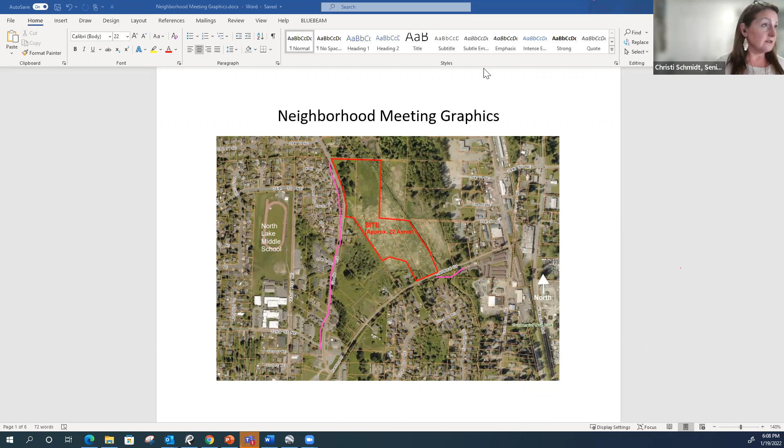As we move down on the screen here, we're going to scroll down. Let's get the eraser going here. We don't need the pink line the rest of the time.

As we move through the project timeline, many of you have been involved with this particular project for many years or have been aware of the historical nature of the site. Even around 2008, the city purchased properties from a private property owner, and the city had originally intended for the use of these properties to be a civic campus.

Back approximately, roughly around November 2016, Lake Stevens Senior Housing applied for a development agreement with the city of Lake Stevens. During this development review application, the city ended up selling these properties back in 2017 to Lake Stevens Senior Housing.

As many of you may or may not be aware, I've highlighted just some key points of the resolution here. The master plan originally, through a development agreement, vested a conceptual site plan and the zoning code and regulations at that time. It essentially vests the developer in place for development regulations.

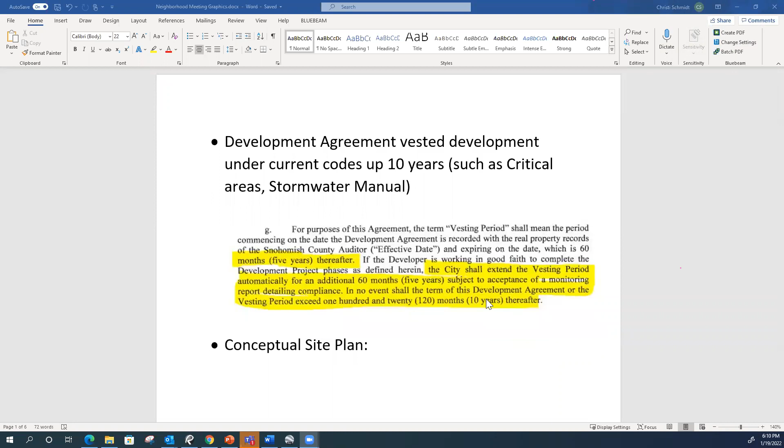As you can see here, the vesting period could be up to 10 years. So that is why when this development is being reviewed currently, it is vested actually under older development regulations.

As an example, if in future upcoming correspondence you see that a wetland buffer is smaller than what is under current regulations, that's because they are vested under the older regulations with different standards.

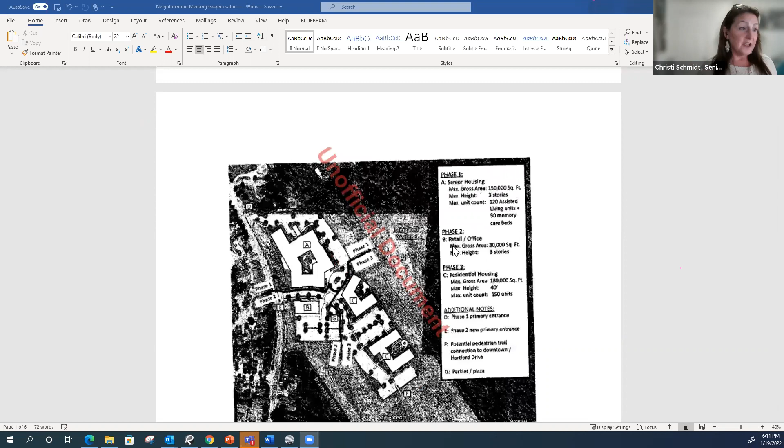So the conceptual site plan at that time for that particular development agreement, you may recall, had 3 different phases. Phase 1 had a senior housing component. Phase 2 had retail, office, and some employment factors. And in addition, it had a component for residential housing.

And here is the older site plan, the conceptual site plan for this particular area.

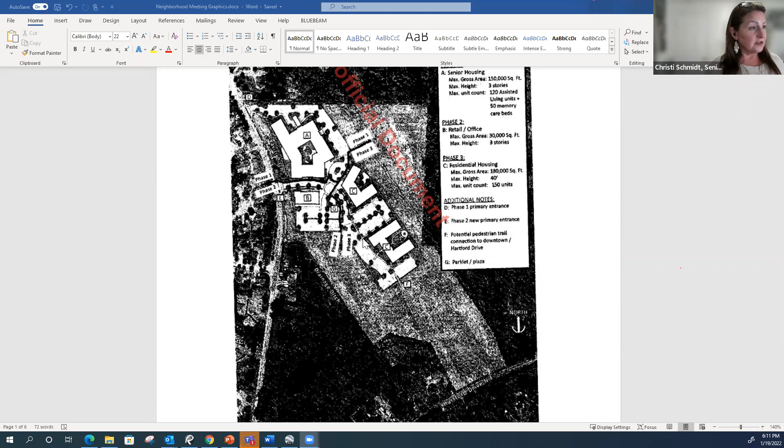Then in 2021, the development agreement was amended to allow residential uses and greater flexibility. That amendment was approved last year in August, I believe. The project planner is also here present this evening, should anyone have any specific questions regarding that amendment.

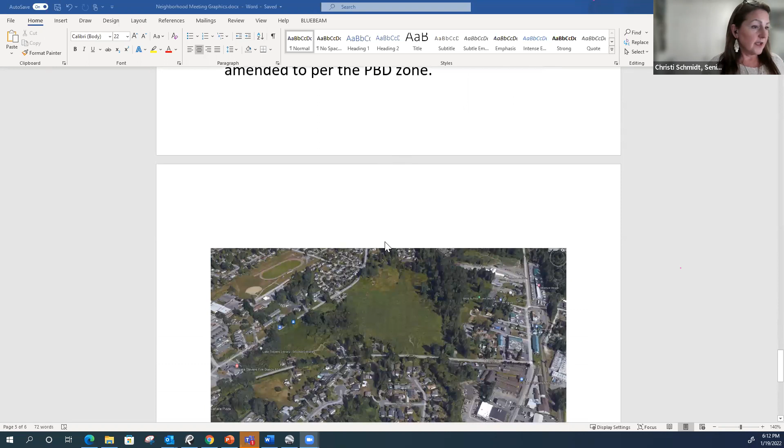Consistent with the development agreement amendment, LDC, the applicant, and MSR Communities submitted the current development application, which you see before you today. And with that, I'm going to go ahead and pull up the preliminary site plan just to show it, and then I will turn it over to the developer so they can present the development application.

Currently, the development proposal represents the residential portion and component of phase 3 of the original conceptual master plan. They are currently proposing a mix of single family homes along with townhomes: a total of 28 single family homes and 29 townhomes.

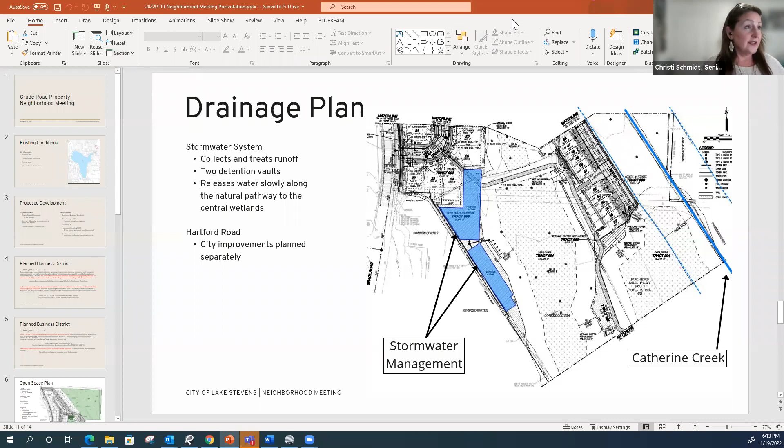Okay, thank you, Christi. I'm going to pull up the presentation. All right, can everybody see that?

Yep, okay. Hello, my name is Samantha Adams. I'm with LDC, and I'm a planner that has been working on this project out on Grade Road. I put together this presentation really just to give everyone a little bit of information about what's being proposed on site before we get into some of the questions.

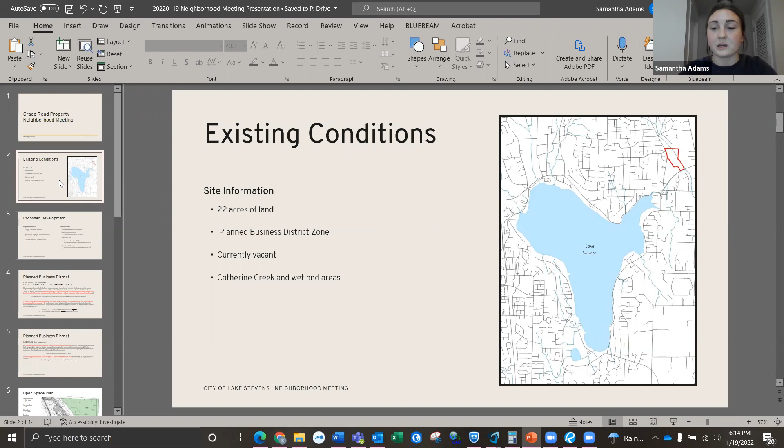Christi already mentioned some of the information that I'm going to cover, but this site, as many of you know, is located in the northeast area of the city of Lake Stevens. It totals 22 acres of land and is made up of 6 different parcels. It's in the planned business district zone, and the site is currently vacant, but Catherine Creek and associated wetlands are present on site.

A little bit about the proposed development.

Of the 22 acres on site, roughly 6 acres will be used for development. The remaining area on site will be left as protected critical areas and recreational open space. And as Christi mentioned, what's proposed on site is 57 residential housing units. Half will be your standard single family home, half will be attached single family home.

A little bit about where we're at in the permitting process. As Christi mentioned, there was a development agreement that was amended last year through the administrative modification process. Now we're currently at the point where the master development plan and the preliminary plat are being reviewed concurrently by the city of Lake Stevens.

Then for your environmental permitting and review, it's your standard SEPA and stormwater permit issuance by the Department of Ecology.

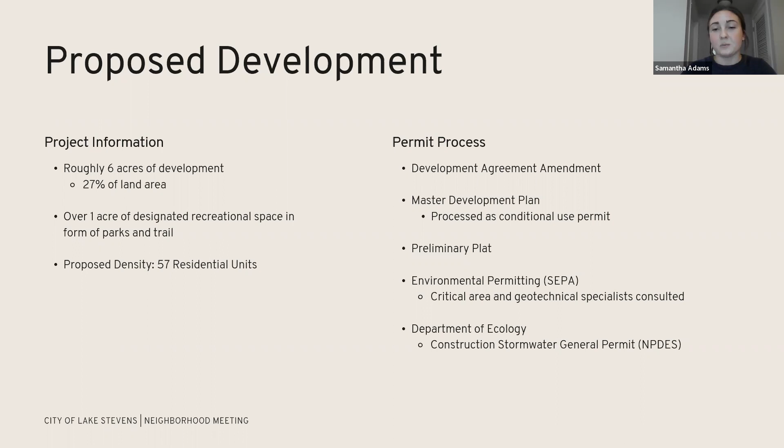I just want to touch on a couple pieces of the planned business district code as it relates to developing fully residential within this zone. Developing fully residential in the planned business district is allowed when certain criteria are met, and I just want to go over those 4 criteria. Clay White is going to go over the first criteria, and that's the economic analysis. That's the first requirement.

One of the things I'm happy to take questions on is I was involved with the project with the previous folks that were looking at developing the site for the senior housing and assisted living facility. When the original development agreement was applied for, as Christy had shared with you, there were some commercial components originally planned for. But after the development was approved, we went through the same analysis on commercial, and it was discovered that it just wasn't economically feasible to provide commercial there. It just didn't have the right mix of traffic. We had hired an economist as part of that project too, and it just didn't pencil out. It just doesn't work for that site for the uses that were proposed.

So fast forward, we're part of this project, it was looked at as well. While the code mentions mixed use or commercial uses, it also has a process where if you're not going to propose a commercial element to your project, there's two tests. One is demonstrating why it may not work. But two is making sure that it's not going to frustrate the overall goals of the city in terms of jobs or economic development. So we had a study produced by ECONorthwest that's part of our application packet, which goes through the code requirements as to why we're not having a commercial component as part of this project.

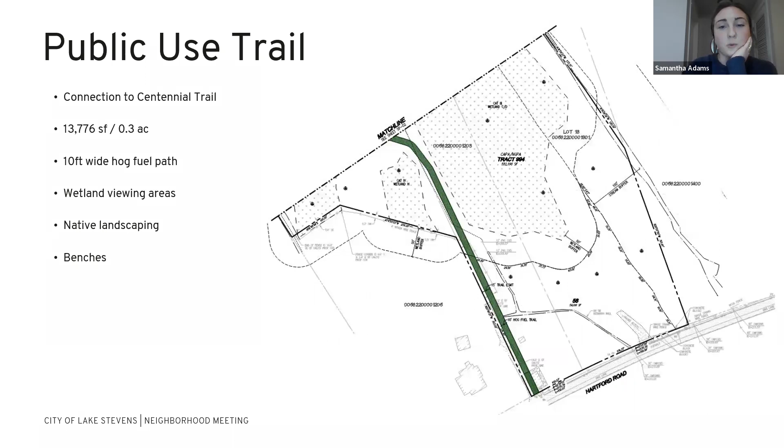Next, we're going to talk a little bit about stormwater management, and I'm going to have project engineer Joe Hopper talk about that.

Okay, can everybody hear me?

I'm Joe Hopper with LDC. We've done some preliminary analysis of the stormwater on site, and what we're proposing is to treat the stormwater in a stormwater vault, or what's called in the industry an R-tank. That's one of the options we're looking at. We're still flexible because we're in the preliminary phases. What we'll do is collect all the stormwater runoff and store it in a standard stormwater vault type structure underground. That allows us to use the space the stormwater facilities are in as dual purpose—we can place park area on top of that, so we're using the space twice.

We'll be modeling our stormwater to the pre-developed runoff rates and peak rates, so we will not harm the downstream environment. We'll disperse the flows from our stormwater facility into the on-site wetland, and once the water gets into the wetland, it flows further south to Hartford Road, to the ditch along Hartford Road, and then ultimately discharges to Catherine Creek. The stormwater analysis was based on the Department of Ecology Stormwater Manual and the City of Lake Stevens stormwater requirements as amended.

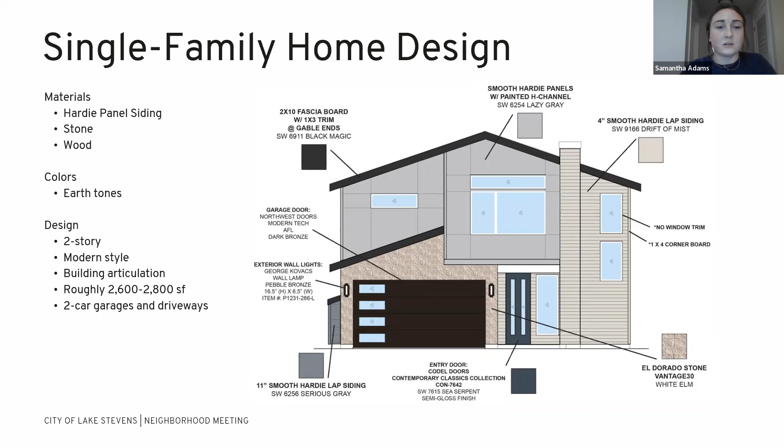Single family homes will be 2 stories tall, roughly 2,700 square feet. The townhome design is very similar in color and materials. These will be a bit smaller, around 1,500 square feet, and they will range between 2 and 3 stories.

So that's really the last of my presentation, and I think we can get into the questions now, but I hope some of that information was helpful.

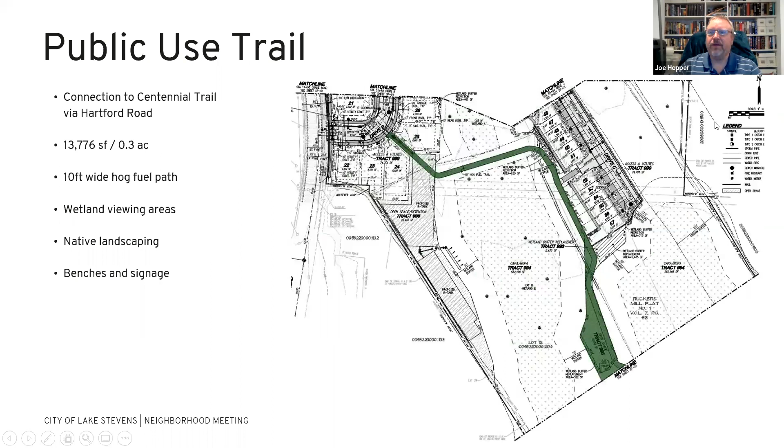So to reiterate where our discharge is for the stormwater, we will be discharging to the wetland, and actually not even into the wetland, into the wetland buffer. So there will be some overland flow from the detention system across the buffer to the wetland. Naturally, the wetland then does drain to the Hartford Road ditch, or the Levitt Ditch as I've been informed now, and onto Catherine Creek.

Downstream, we are aware that there are some issues with the conveyance capacities. That's a city issue, that's not necessarily our issue. I don't want to defer that as far as this development is concerned. And in the technical review, the city will bring up those items as well.

And if there are things that this development will affect, the developer and the engineers will be responsible for contributing or for correcting some issues, or at least sharing in the cost of some of those things as the city identifies them. So that will be part of the technical review. I don't want to step on the city's opinion on that, but that's typically how these projects go.

So what we're trying to do as far as the development is to take the stormwater drainage that comes from the new impervious areas, put it in a holding tank that releases the flows at flow rates even less than what's currently flowing to the wetland, and also cleaning the water at the same time. So we have a twofold facility that will help mitigate the stormwater releases from the development to a pre-developed condition that's actually more conservative than what is there now.

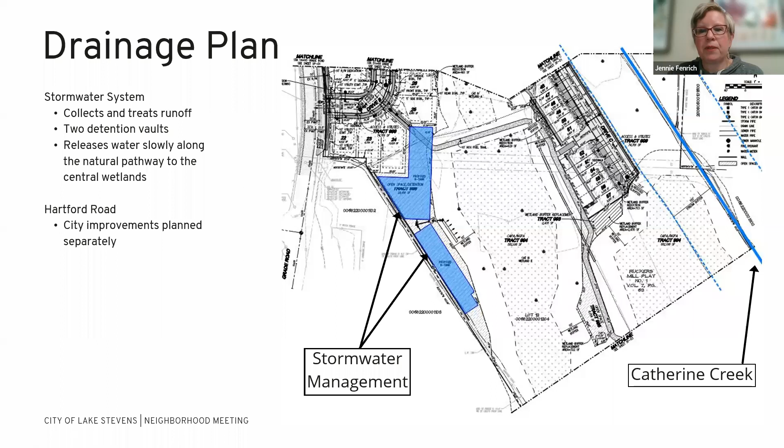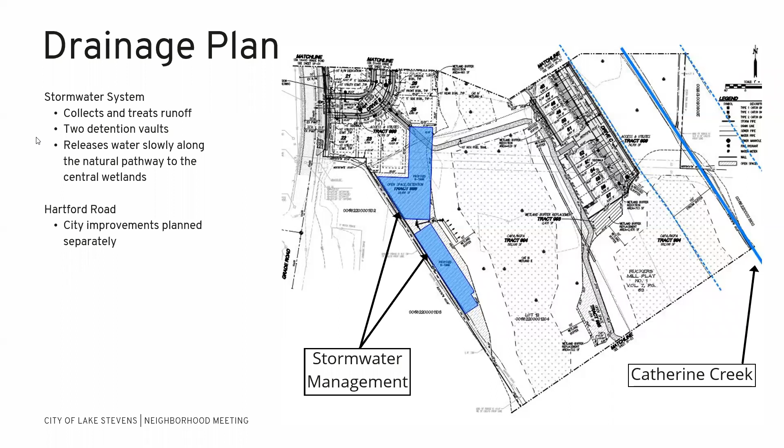I've got a lot of questions, I don't want to get carried away with a ton of them, so I want to go back up a little bit first. In the process of creating a new site plan based on the old, you went from a very large healthcare plan, scaled that down to something smaller that was now entirely residential. I'm wondering, in that process of redesigning the site plan to fit current needs and current economy, did you consider affordable housing of some type? Did you look into that?

Yeah Sammy, I can take this one if you like. Yeah, that's fine, it's just hard for me to see who's speaking when I don't have this window up. So I think all of you can see the window. I apologize, but I do need it up. Okay, yeah.

Just talk a little bit about the old project - it's 2 different groups of people working on that. The previous project went through a lot of design iterations after the development agreement was approved, and it ended up that it just wasn't financially feasible for the group. Then it sat vacant for a number of years, and others looked at it for the same thing, and it just wasn't gonna pencil out because it's a complex site. So in terms of affordable housing, that is not something we looked at as part of our original submittal here. We're proposing it just as market rate housing.

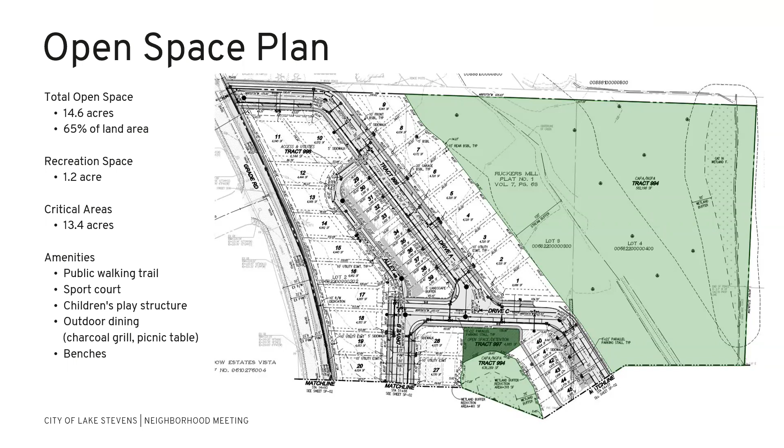So, another question: in the land use application, it talks about the approval of the development agreement, and then it was amended through an administrative modification. I believe that's what you're talking about—is that correct? Yes, you're absolutely correct. Who made that? Who approved that administrative modification? The minor modifications—let me pull it back up.

Yeah, I can chime in on that. The administrative modification is actually a type 1, an administrative decision. It does not require approval. It doesn't need to go to the hearing examiner, and it doesn't require going back to the city council.

Development agreements are a type of land use application that can be modified through that administrative modification if it meets the criteria in, I believe, chapter 14.16C.025. You need to meet all of the criteria in there. Some of the major ones are that it can't create new access points, and it can't increase the density or intensity of development on the site. As long as it meets all of the criteria under the administrative modification, it can be modified through that admin mod process as opposed to being processed as a new development agreement.

That was what was issued back in August. That decision, being a type 1 decision, is issued by the community development director. I'm not sure if that's been uploaded to the city website, but that's something we can upload or make available so people can see the staff report and the decision issued by the community development director on that administrative modification.

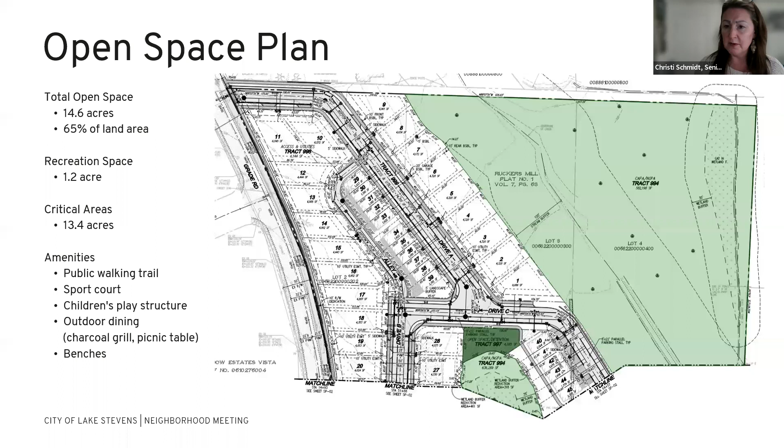Yes, that has been uploaded, and so have the 2 other development agreements. I uploaded them to each application last week, so you'll see those uploaded there. And I can go ahead and share my screen right now if that would be appropriate. Samantha, if you wanted to stop screen sharing really quick, I'll just pull it up.

While you're doing that, if you could forgive me for my ignorance, but who is the community development... forget the title, what you just said. I'm just really trying to get to who approved this.

Sure. Yeah, so Russ Wright is the community development director. I don't have my participant screen up on, but I know that he was on earlier. But yes, he's the one that has authority per the Lake Stevens Municipal Code to issue decisions and approve applications for type 1 land use applications, including administrative modifications. Thank you, thank you very much.

I have one comment, and there was some discussion of this earlier. One of the homeowners there was talking about it. The previous attempt at a development, as I understand it, was abandoned because it wasn't economically viable, due to the wetlands. As I understand it, because of the wetlands, there just wasn't enough developable area to do it.

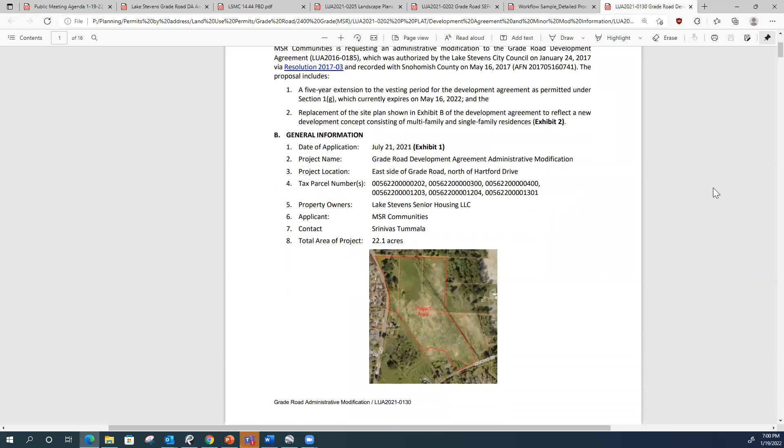The other thing is, this can't be done in a vacuum. I understand the developer's not responsible for the existing flooding. It's been told that the city is, but everyone that lives in this area knows that from the apartments just south of Hartford, all of Hartford, the whole area has flooding issues. I understand that the water will be retained and then fed out into the open space at a lower rate than it might be now, based on study, but it still rains and it's still going to have water, and the same amount of water is going to go into what's left of a smaller open space. That whole area floods as it is right now.

And this entire development goes right up against Catherine Creek, which is a spawning stream. I would need a lot more convincing to be convinced that this is not going to make things worse. It is bad right now, and what we've got is kind of a mess right now. We're saying, well, we're pretty sure that we're not going to make it worse, but again, it can't be looked at in a vacuum because it's a mess right now. That's all I have to say. Thank you for your time.

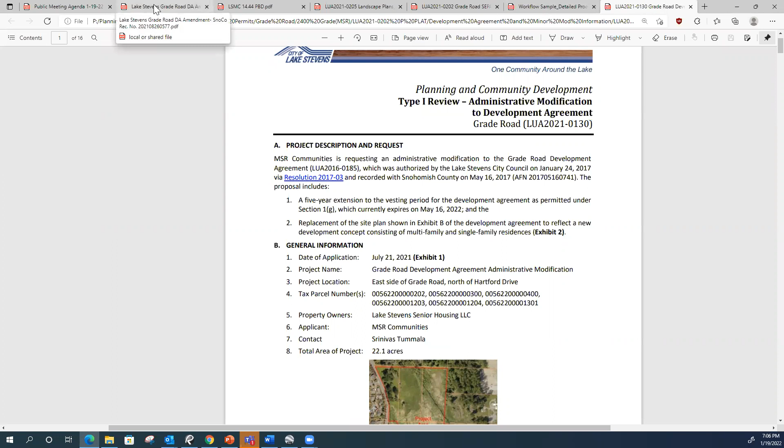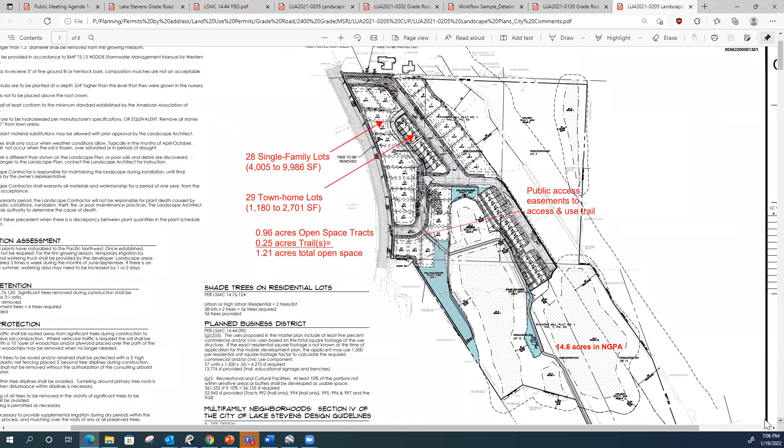But I used to live up near the high school, and I think it was about 6 or 7 years ago, off Highway 92 and behind Highland Elementary School. A very, very large development went in and was a shock to everyone because at the time it was explained that the permit was, I think, maybe 15 years. They had asked for the permit in 2006, don't quote me on the exact year. Then the economy happened, and they renewed it, and renewed it again, and they were coming to the end of it, and they had to get something going. I thought, and I may be wrong, that the city had decided there was only a certain number of permits like that still out there because the economy had been hurt and these permits were coming up.

Now I'm hearing this one is on the second round and they're able to go back and keep some of the requirements of the first permit. And I thought we weren't going to do that, that new permits would have to follow the new codes. And if that is not true, how many permits are still out there that will be able to build on old codes? Thank you.

Okay, sorry, I had some extra comments pop in. Sue, in response to your question, I'm not aware of the historical reference of that project since I'm recently new to staff, starting last year. I do know this particular project has been around since 2016, and they do have vesting requirements. I'm not familiar with the specific project you're referring to, and I don't know if any other staff on this meeting has background information to respond. If so, please feel welcome to speak. If not, I'll have to save that, or you could email me and I could address it offline.

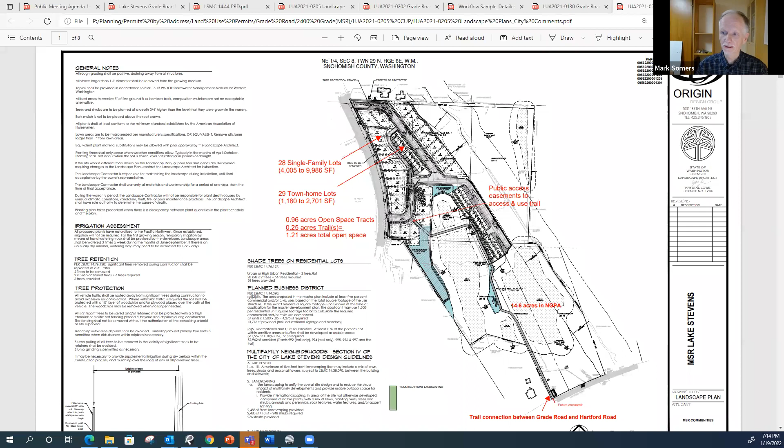Okay, well, no, that's good to know. You can ask to be put on a list, a contact list. Yes, and I will go over that just as soon as we have all the questions answered. Okay, thank you. Can I ask one more question? Of course.

We're going to have playgrounds, open space, recreational area, and the trail. Will there be on-site parking for those picnic tables and barbecue grills? Yes, Tom, there will be some parallel parking spaces along the internal drives on site.

Thank you. And then the city is having trouble dedicating what we call tot lots or subdivision playgrounds. The city no longer really wants those dedicated. How are you going to get around that contradiction?

The open space areas are going to be private. They're part of the development with the exception of the trail system, so those will be maintained privately. That is correct. There would be a public access easement through the private roadway, the public roadway, to access the trail through the development, but the separate recreational tracts are owned and maintained by the HOA.

But is the public allowed to use the barbecue grills or the playground equipment? It's being designed for the residents. The trail is open to the public. Then how does that meet the 5% civic use requirement? It's the trail, if you calculate the square footage.

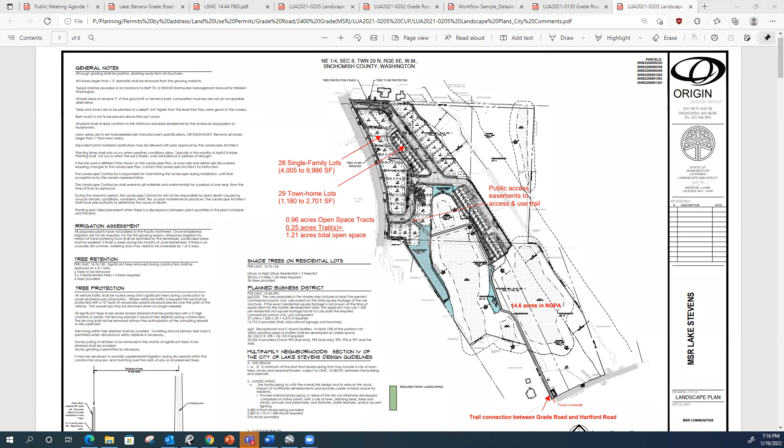Thank you. So does anyone have any technical comments? If there's no further comments coming in, I want to share information about where to go to provide further comments through the city's review process. There'll be opportunity for that, and you can always email comments to myself, the project planner. My email is available on the application page, the notice of application, and on the city's website under current projects. You'll see it listed under the file numbers. If you click on it, it has all my information, and you can feel free to call me or send an email with any further questions, comments, or suggestions.

With that, I would like to say thank you, everyone, for what I'm going to call a successful public meeting, because we had a good turnout, good dialogue, questions, and we were able to get information out there about the initial project proposal. Thank you very much for attending, and please let your neighbors know about the proposal and where to get information, and they can always contact me if they have further questions.